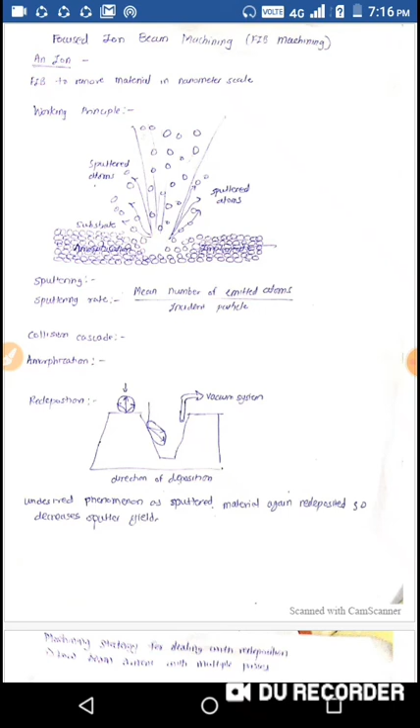The sputtering rate is found by the mean number of emitted atoms divided by the number of incident particles. From this diagram you can see the ion going downward and striking the substrate surface, and because of that, the surface atoms are displaced. These atoms are called sputtered atoms, and the ions are continuously making a hole deep inside the substrate surface.

Now, the ion possesses a very high kinetic energy. When the incident ion undergoes a series of collisions in the target surface, each atom on the substrate surface carries that kinetic energy from the collision and again initiates a new series of collisions. This is called cascade collision or collision cascade. In a collision cascade, several atoms are ejected from the target surface, as you can see, sputtered atoms.

The incident ion goes deep inside the target surface, and it damages the lattice structure by displacing the adjacent atoms. So you can see here the atoms are displaced, and if you want to increase that cascading effect, we can accelerate it by using high energy incident ions.

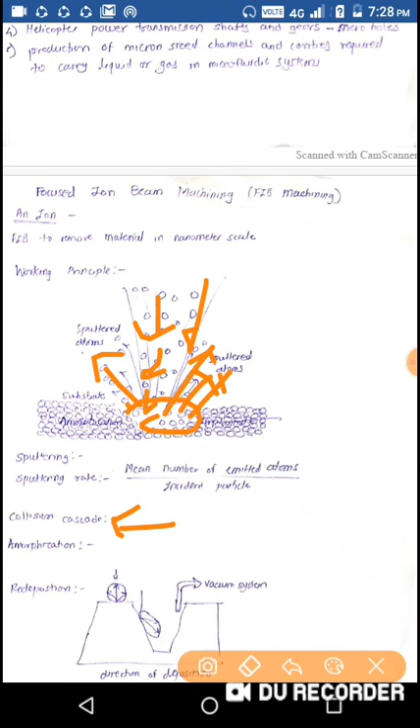Okay, there is another term called amorphization. It is nothing but the displacement of atoms that leads to the generation of point defects in the crystalline material, and it undergoes a phase transition to an amorphous state. This is called amorphization.

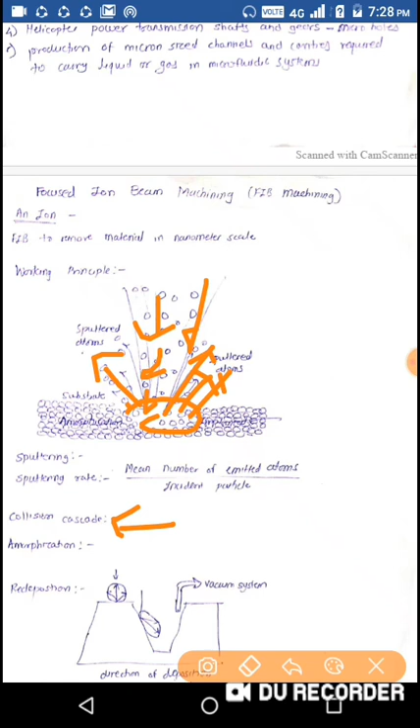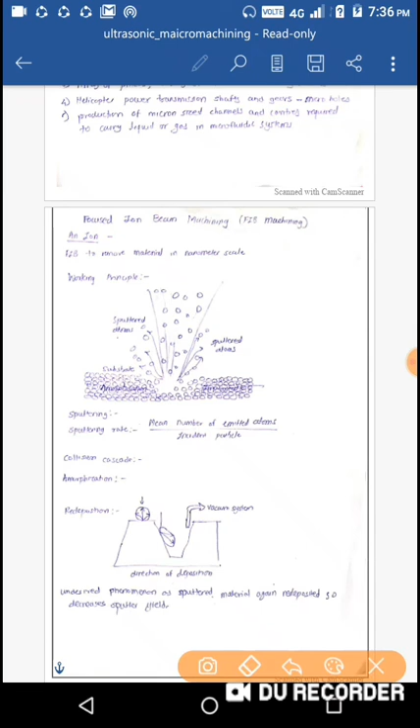During the sputtering action, there is one undesired effect called redeposition, which is actually causing the degradation in the quality of the milling operation. To understand this effect, let's see: the sputtered atoms are actually striking the substrate surface like this, but most of the atoms are evacuated by the vacuum system, but a few atoms escape from the vacuum system and they again settle on the site being sputtered.

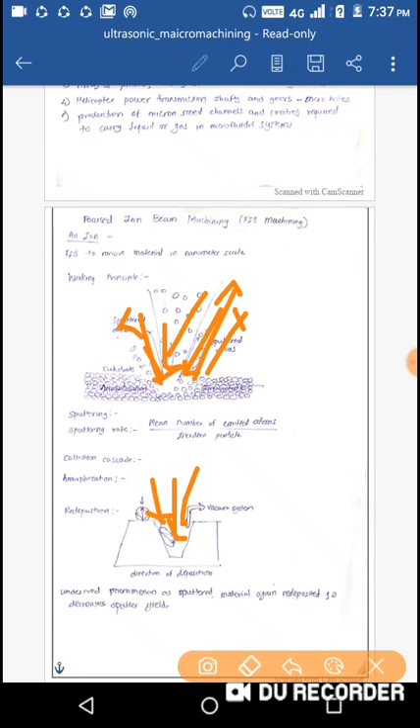So actually where the hole is made, there the atoms which are not able to evacuate go inside the narrow slots or narrow holes, and these are nothing but redeposition of atoms, and they are difficult to evacuate from the bottom surface. So this undesired effect is actually causing the degradation of quality of the milling operation. This phenomenon can be reduced by maintaining the beam current, dwell time and beam spot overlap percentage.

Well, there are generally two strategies used to deal with this undesired effect, that is redeposition. Generally, if we increase the sputtering rate, there are chances that the redeposition rate will also increase. But if we use low beam current, then it will decrease the machining rate. So to maintain the high material removal rate, an ion beam with low current makes faster repetitive passes with a faster pattern instead of a slow single pass with high beam current. It is used so that we can avoid the redeposition effect.

Second is the parallel milling. Now, if we first drill the hole on the substrate surface and we go for the second hole, what is happening during drilling the second hole is the debris from the second hole again moves into the first hole. So to avoid this, we can do parallel milling. In parallel milling, the beam simultaneously mills both the holes and the redeposition can be avoided.

Well, in FIB machining, we are generally using the ions, but there are some other methods like gas assisted FIB machining. It is used as the material removal rate of focused ion beam machining is very low. The same process we can enhance by using some reactive gases, as these reactive gases increase the material removal rate 10 to 20 times. The gas molecules, when used, are absorbed on the substrate surface, and when the ions strike the surface, the absorbed gas ionizes, and chemically reacts with the substrate surface, which helps in the milling process. So you can see here the gas assisted FIB machining.

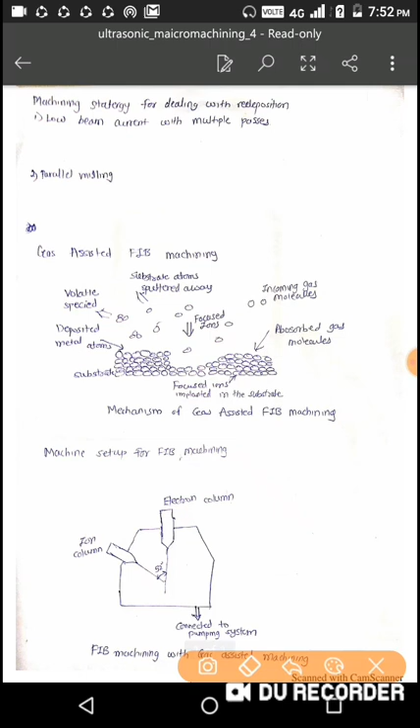In all this process, what is done here, an ion is striking the substrate surface, as I have explained earlier. In this, the only thing is that the gases are used. Okay, these gases are absorbed into this substrate surface, and when the ion strikes the substrate surface, these gases chemically react with the substrate surface and they help the milling operation.

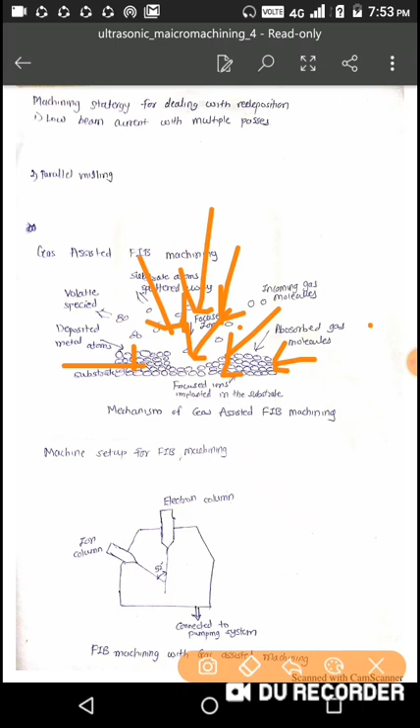Let's talk about the components of the latest focused ion beam machining. In this, I have already talked about the ion column. The ion column is used to generate an ion beam which is directed towards the substrate surface for the milling operation. There is also an electron column used. This electron column is nothing but a scanning electron microscope. It is used to generate the electrons which strike the target surface and generate the real time image for observing the FIB process at the target zone.

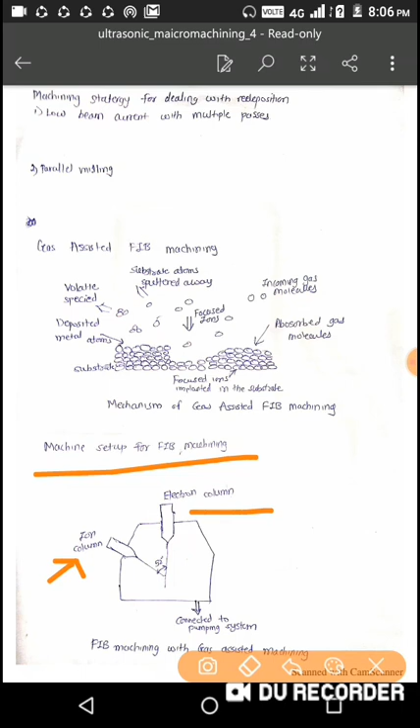Along with this, there is also a GIS system. GIS means gas injection system. It is used to inject the gas onto the substrate surface. So all these three components make the latest focused ion beam system.